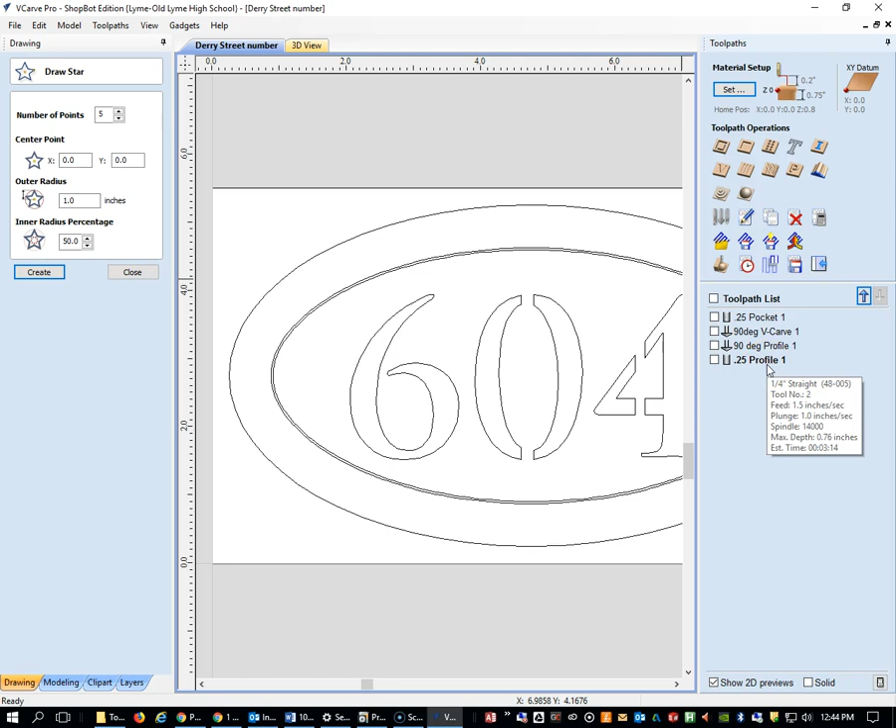If I click on those, the VCarve software will illustrate where the tool is traveling relative to the artwork. You can see that the bit is on the outside of this line, and this right here represents those tabs that we put in. If yours doesn't have that, certainly want to add those.

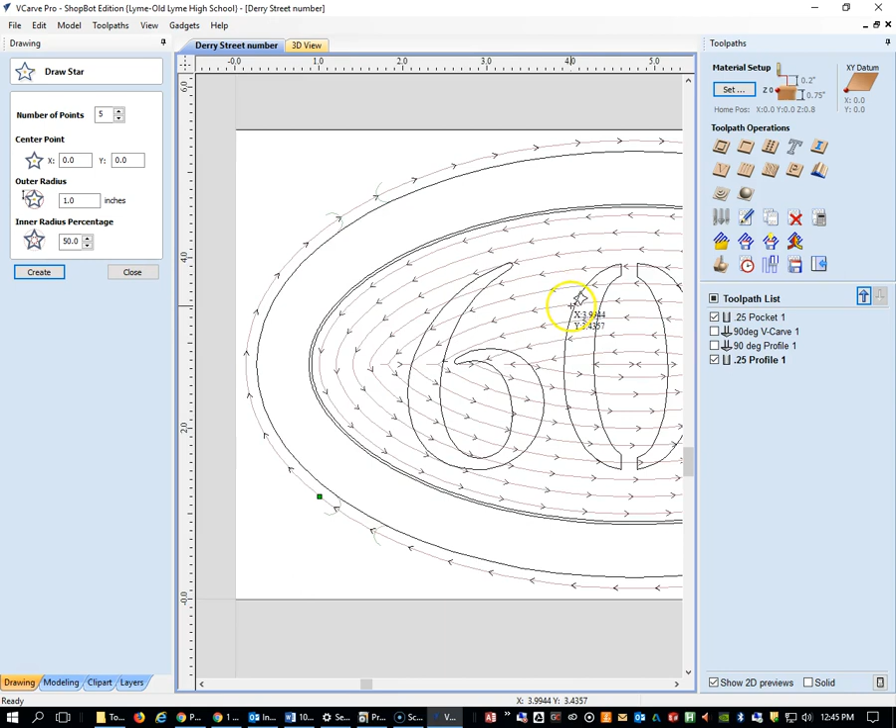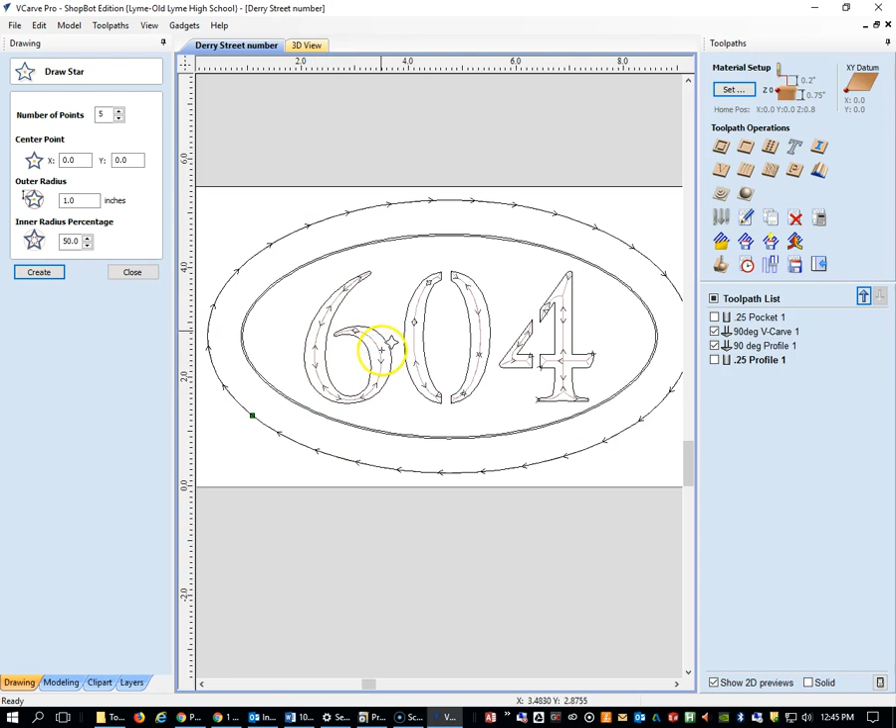I'm going to turn those off for a moment. If you highlight these two, these are the toolpaths that we've got for our 90-degree bit. The 90-degree bit is going to be used both to put a chamfer on the outside of our oval, and it's going to be used to create the VCarve cut for the numbers. So take a look at those.

Now the pocket, it doesn't really matter where they're listed here, other than the profile being the last toolpath. So we want to post these now.

I'm going to double click to make sure our settings are correct. So I'm going to double click on our VCarve and make sure that we have a V bit that's 90 degrees. And I'm going to hit the edit button just to make sure that our feeds are right.

So we're currently feeding at 3 inches per second, which is very fast, but we're cutting through plastic, so I don't anticipate that being a problem. We certainly don't want to melt the plastic. If we need to make adjustments, we will, but I don't think that's going to be an issue.

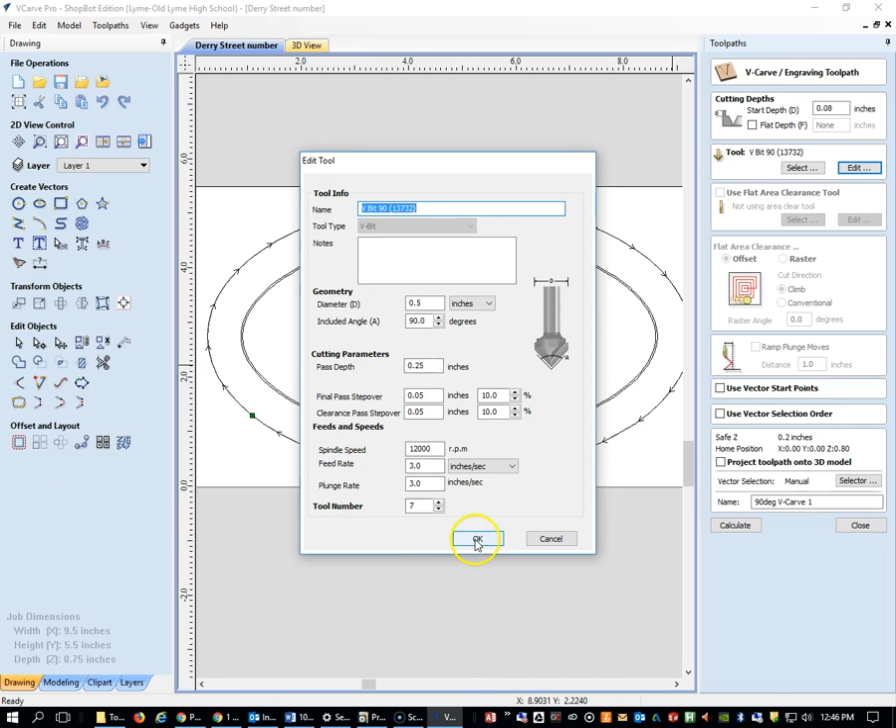So close that out. I'm going to double click this just to make sure that it's the same bit, and it is the V bit 90. I'm going to hit edit, make sure my feed rates are the same. I'm okay. All right, I'm going to hit close.

And those two toolpaths are ready to export. I'm going to select them both so they're both showing up. And I'm going to go to Save Toolpath. I want to output all visible toolpaths to one file.

If I have these selected, it won't let me do it because it's a different bit. So I'm going to deselect that, make sure I only have the 90-degree bits selected, and look here to once again confirm that they're both the same bit. If these are two similar bits, it's not going to work. They need to be exactly the same.

So I'm going to save toolpath, save it to my CNC folder, and call it last name 90-degree numbers. Hit save. I already have it, so I'm going to save over the top.

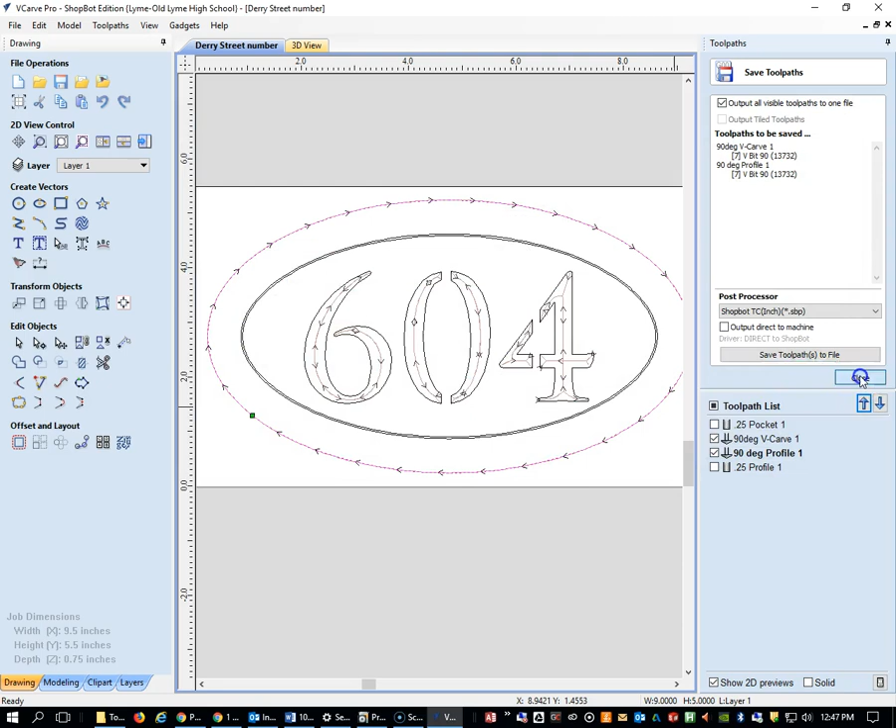Close that out. I'm now going to select the two 1/4-inch bit toolpaths. Again, I'm going to take a preview, and save those. Output all visible toolpaths.

Both of them are the same exact bit. Save toolpath as 0.25-bit profile and pocket. That's what you should call it, except with your name.

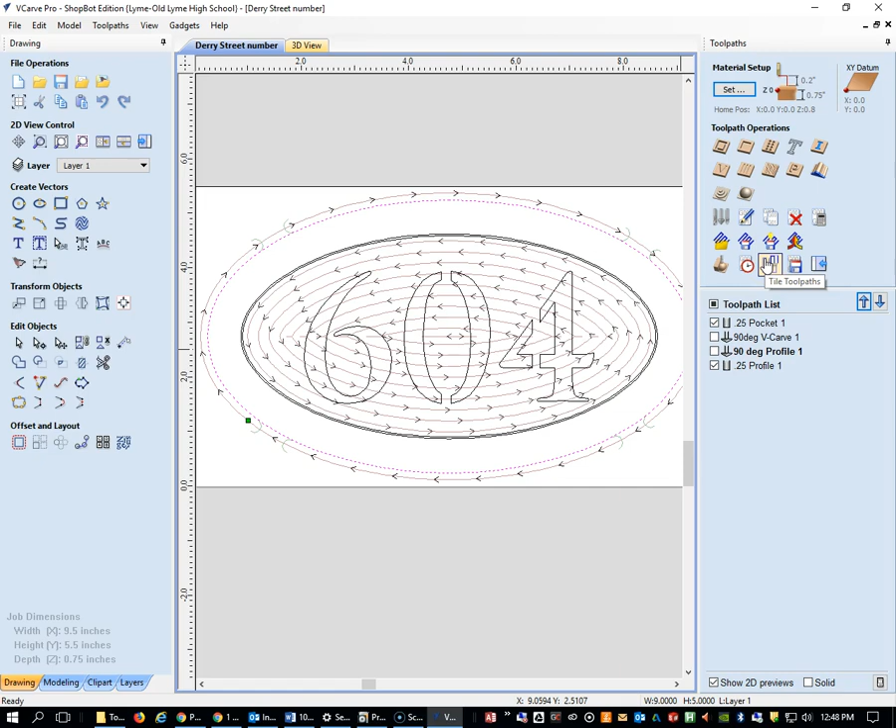Hit save. Now, we've already done this, should have done it at the beginning of this video, but I'm going to do it one more time. I'm going to go to preview, and preview the two toolpaths that I've made visible and see what that looks like.

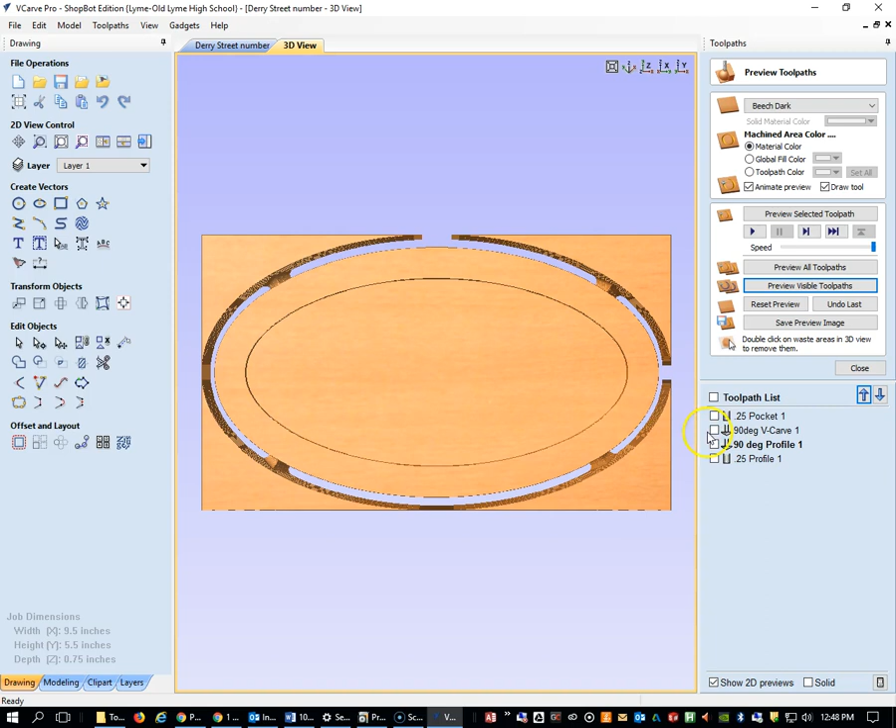So that's my pocket and my cutout. That's something we're going to do after we do the other toolpaths. I'm going to select these two now and preview those visible toolpaths.

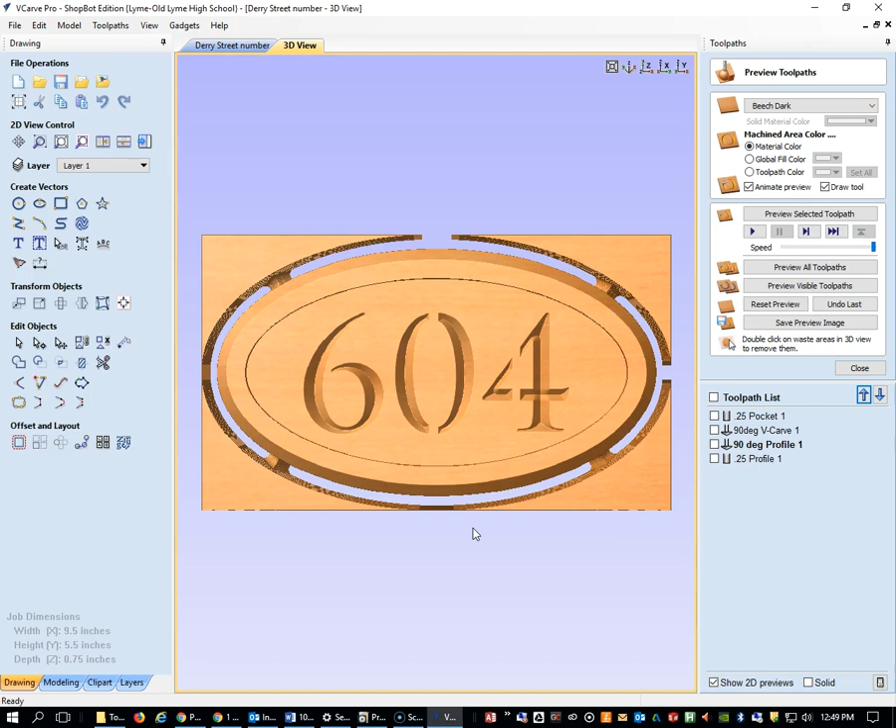And now we're looking at all 4 of them because I didn't reset my preview. Definitely do that. If you end up with something that doesn't look right, you can get a hold of me and I'll help you straighten it out, but your part should look very similar to this when you're done with the preview. All right, that's it.